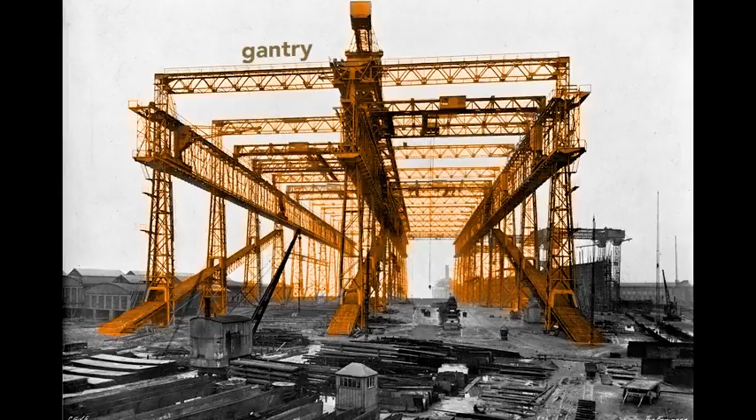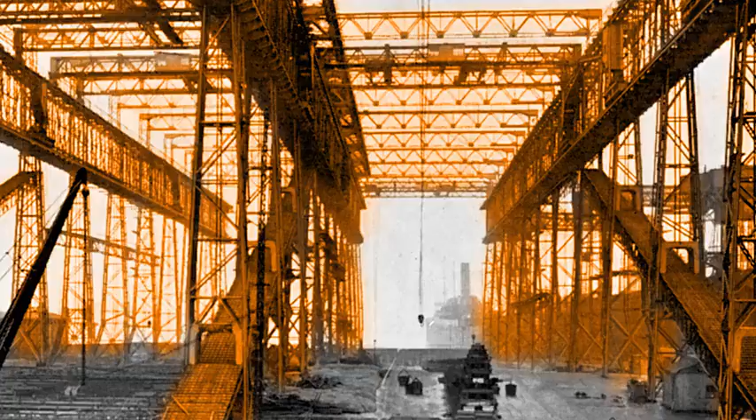This large framework, called a gantry, surrounds the ships as they are built. It supports the overhead cranes and scaffolding used by workers as they construct the Olympic and the Titanic. Notice that just beyond the far end of the gantry lies the Belfast harbor. Workers will build the Olympic here on the right, and then 9 months later, before the Olympic is finished, they will start on the left the Titanic. When completed, the Olympic's stern or rear end of the ship will point toward the harbor.

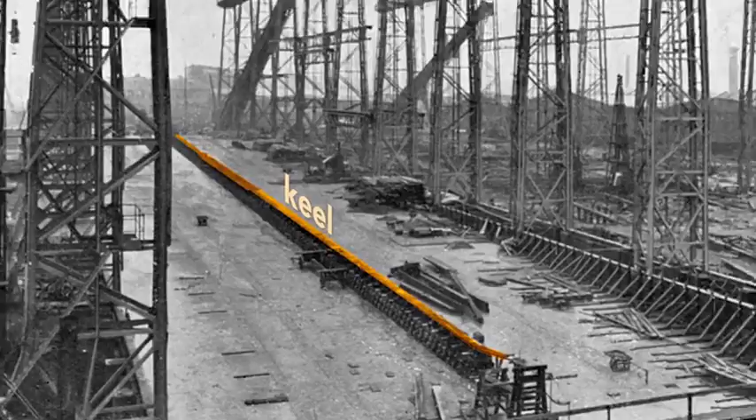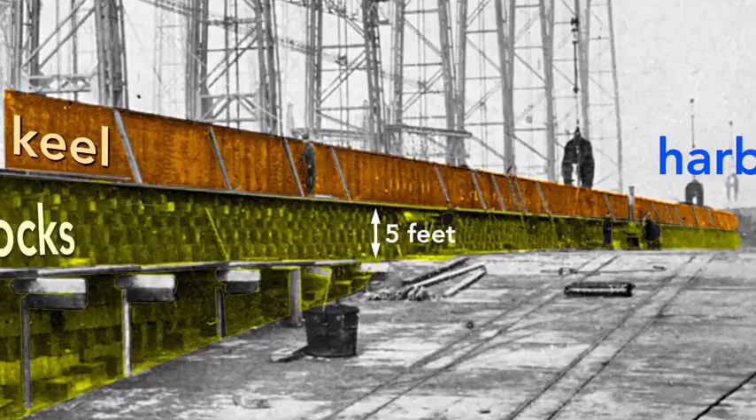The ship's construction starts with its keel, seen here as a long, dark shape. The keel is the backbone of the ship and gives the ship rigidity. If we look at the keel from the land side, we see the keel blocks that support it. These wooden blocks, typically pine, separate the ship from the slip, the concrete floor of the gantry. Each keel block stands about 5 feet high, so this creates a space under the ship for workers to construct the ship. Workers build the ship outward from the keel.

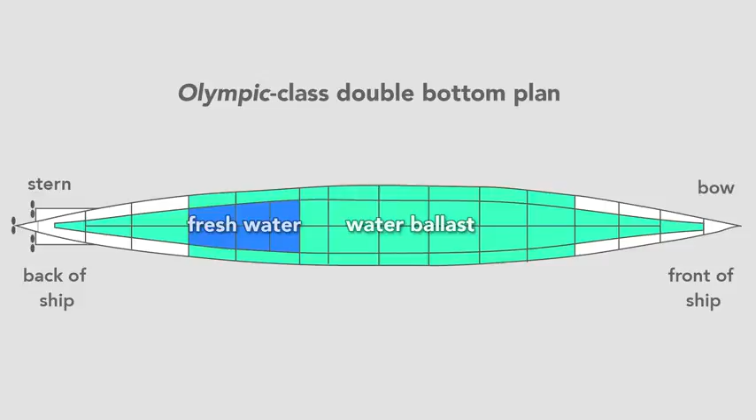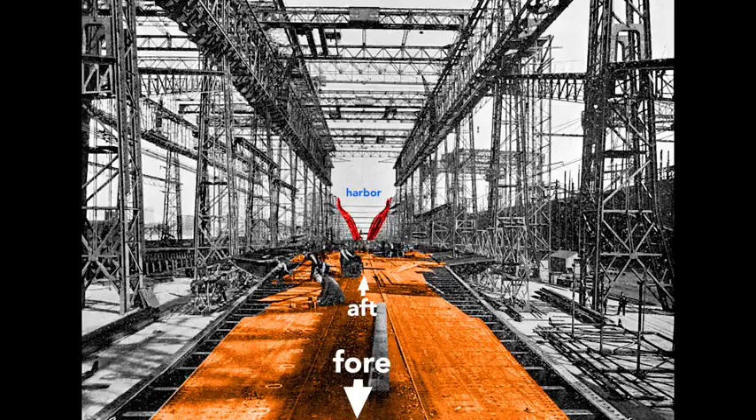Once they finish the double bottom, workers erect the framing for the hull. From this view, we see the framing for the stern of the ship. It's what a worker would see standing on the tank top from the fore and looking toward the aft of the ship. That's where the harbor is. Looking closer, we see the rib-like structure on the start of the transverse frame of the ship. Workers rivet to this frame the hull, which will form the skin.

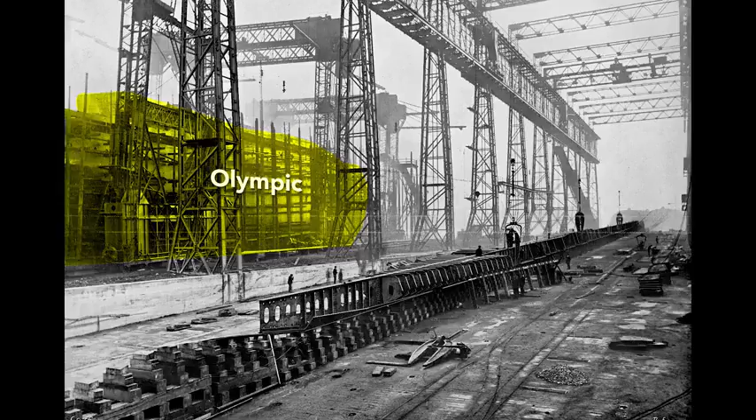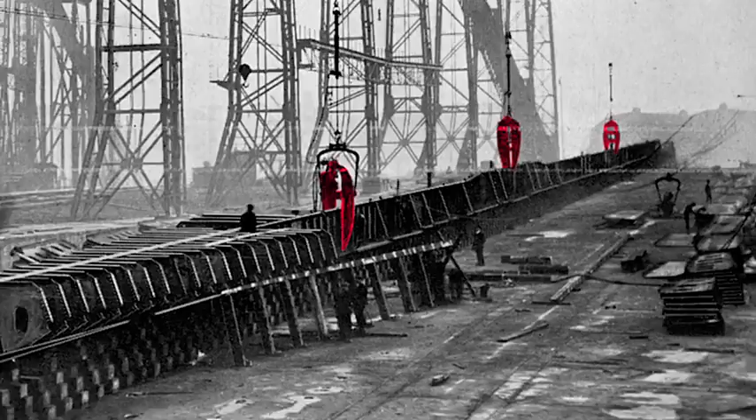So far, we've watched the Olympic's construction. In the gantry, that ship sits here in the background. In the foreground lies the keel of its twin, the Titanic. Its construction began 3 months after the Olympic. We see here, attached to the keel, the framework of the Titanic's double bottom. Notice this large claw-like mechanism lying on the ground, and these three hung from the cranes. These are hydraulic riveters, which workers used to install most of the 3 million rivets on the Titanic.

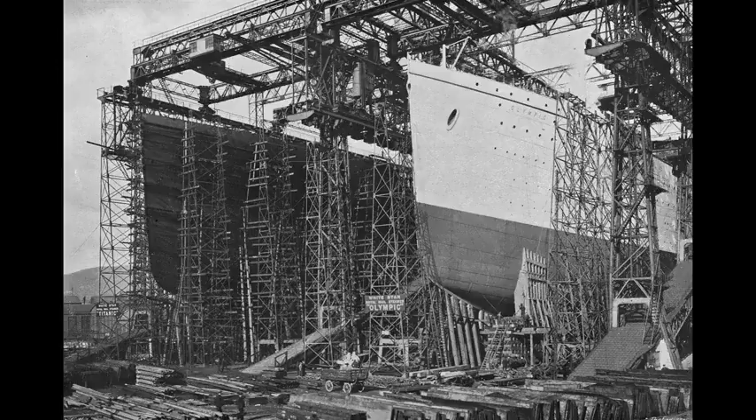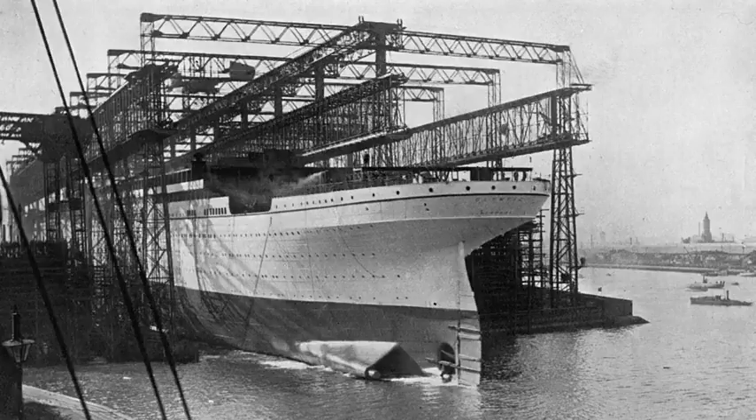Here we see the almost complete hulls of both the Olympic and Titanic. Work inside the Olympic progresses rapidly. The staterooms are being erected and plumbing is being fitted throughout the ship. To prepare for the Olympic's launch, workers paint the ship a light gray so it will stand out in black and white photographs, although they repainted the ship black soon after its launch so that it matched previous White Star liners. To ease the slide into the water, the slip was greased with 23 tons of tallow, oil, and soap.

And then the order to release the ship was given, the hydraulic triggers were released, and the ship slid into the harbor, reaching a speed of 12.5 knots. Notice that the ship is launched backwards. There are many reasons for this, but among them is that the stern, the rear, is wider than the bow, so it is more buoyant. In a mere 62 seconds after launch, the Olympic was afloat. The moment the ship hit the water is its official launch date, although it was mostly empty.

Here it weighs only about 27,000 tons and so rides high in the water. The draft, the vertical distance between the bottom of the ship and the surface of the water, is only 18 feet. After it is completely fitted, it will weigh nearly twice that, 52,000 tons. With that additional weight, the Olympic will drop until the water reaches the border painted on the hull, a draft of about 34 feet.

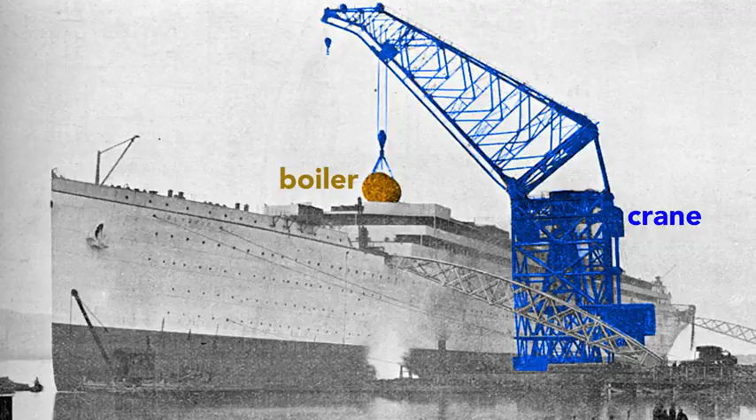The Olympic cannot move by itself, and so a tugboat tows it to the fitting out quay where a gigantic crane loads the ship. Here the crane lifts aboard a cylindrical boiler. The final fitting, including attaching the propellers, is done in dry dock. And then, once everything is in place, the Olympic is ready for the sea.

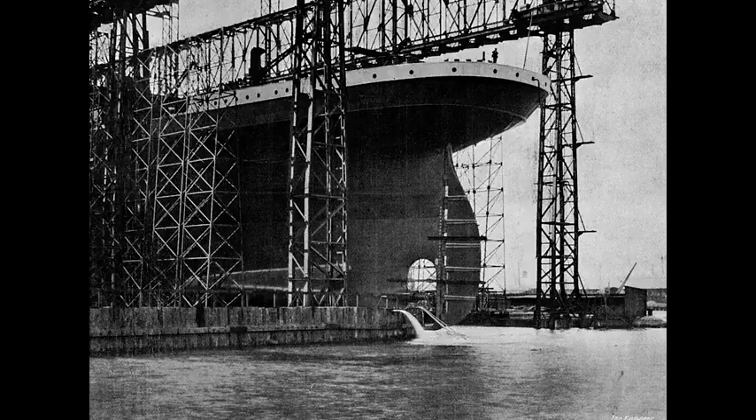7 months after this launch, the Titanic was launched. I have from this journal a few photos of that event, but keep in mind the Olympic got the big press because it was first. The Titanic only becomes of more interest in retrospect. This photograph shows the twins, the Olympic and Titanic.

Although built side by side, this was the last time they were photographed together. Less than a year after the launch of these two giant ships, one suffered a collision that ripped a gaping hole in its side. That ship was, of course, the Olympic.

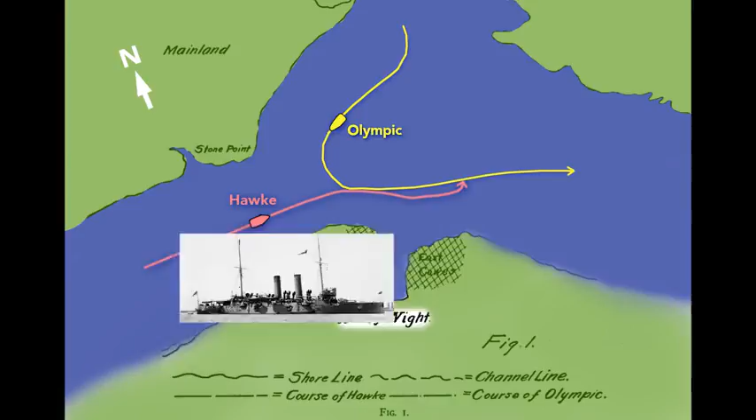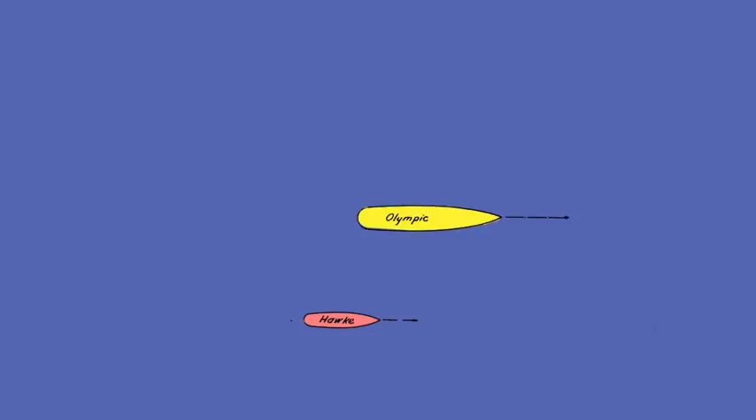In September of 1911, the Olympic departed the port of Southampton, England, sailing toward the Isle of Wight. The Olympic turned into the Solent Strait and passed a British warship, the HMS Hawke. The Hawke's commander was surprised by the Olympic's wide turn, but he managed to take a safe position behind and to the right of the Olympic. The Hawke then increased its speed to pass the Olympic, but the Olympic's wake sucked the Hawke inward rapidly.

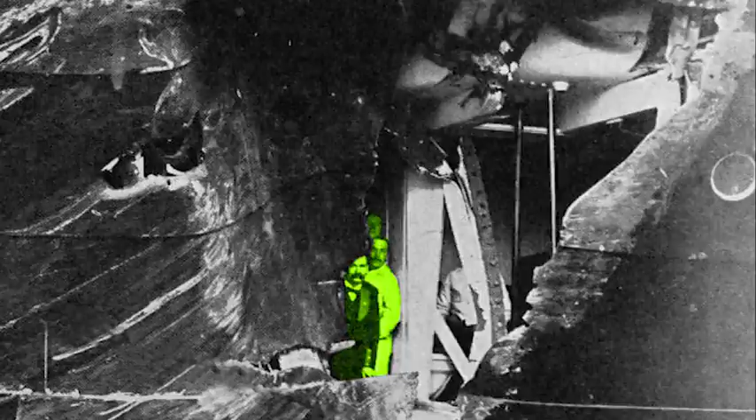The Hawke tore a large hole in the Olympic, and below its waterline, the damage was even greater. The bow of the Hawke was completely smashed in. The Olympic limped back to Southampton, where the holes were temporarily patched with wood before returning to its home dock in Belfast for repairs.

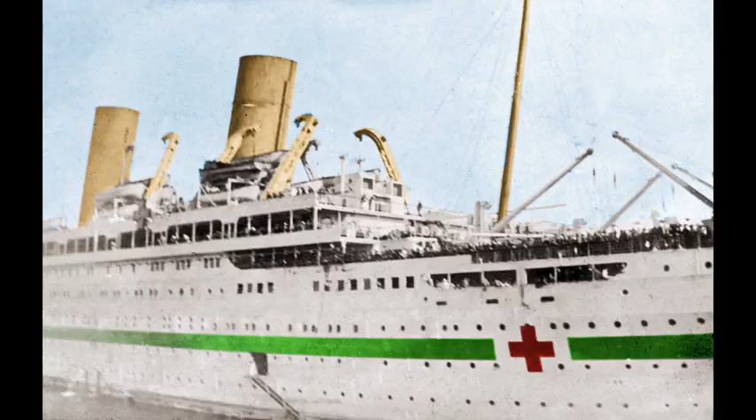The Olympic's sibling also suffered a traumatic blow that caused it to tragically sink. I'm of course talking about the Britannic. The Britannic was the same size and very similar to the Olympic and Titanic. Although intended to be a passenger liner, the ship was drafted into military service in World War I as a hospital ship. While in the Mediterranean, it hit a mine or was struck by a torpedo and sank in less than an hour. Despite these accidents, the Olympic-class ships were great feats of design and workmanship.

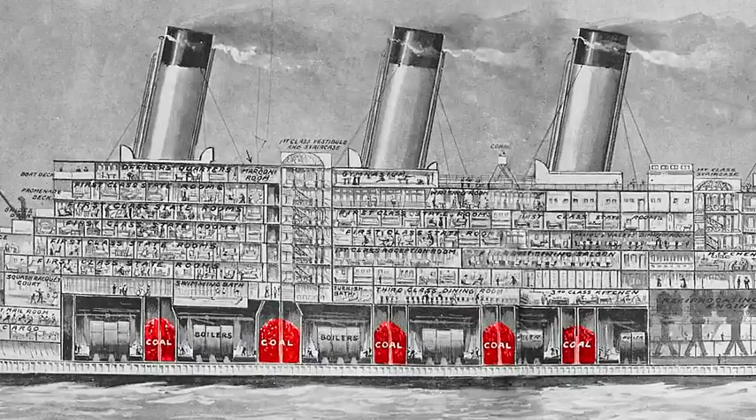Just consider the propulsion system of the Titanic. The ship had two sets of reciprocating engines. These engines were fueled by coal, which was stored along the bottom of the ship. Exhaust gases from the boiler discharged through these smokestacks, which are frequently called funnels. Now, they don't look like funnels until you look at them the right way. They're upside-down funnels. This cross-section of the Olympic shows the boilers sitting atop the double bottom. Exhaust from the boilers is funneled up and out of the ship.

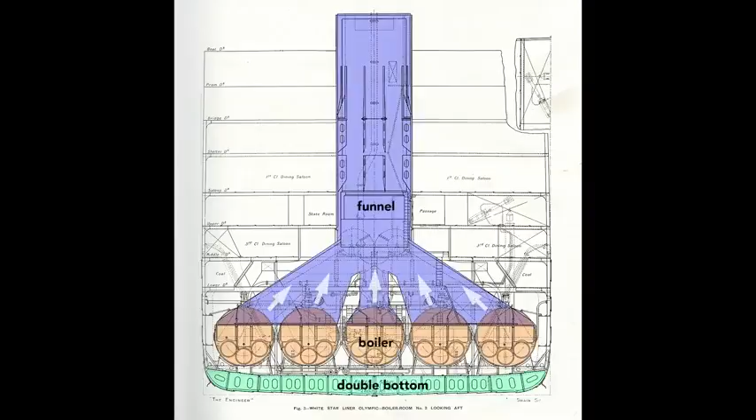It's well known that the aftmost funnel on these ships is a dummy. It was built primarily for aesthetic reasons. Although it did not service the boilers, it was used as a ventilation and extraction shaft for the engine and turbine rooms.

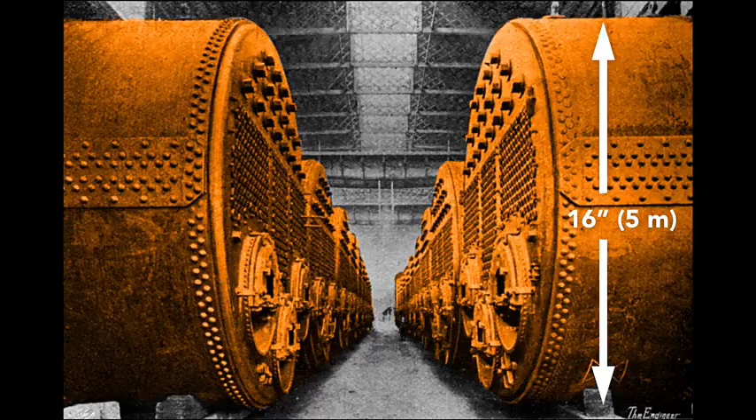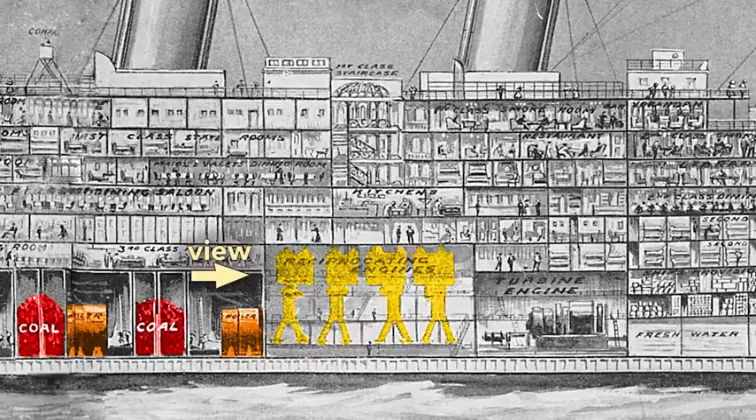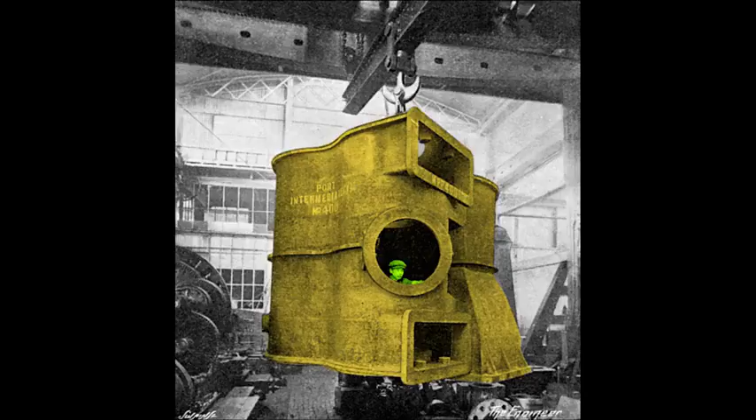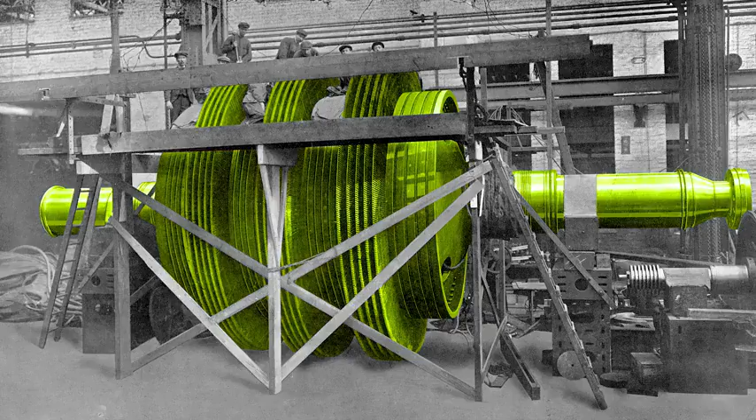Excess steam from these engines was used to drive a turbine engine. This shows the turbine under construction and without its outer casing. Note the workers at the top. This is huge. If you look closely, you can see that the turbine is made of hundreds of individual blades.

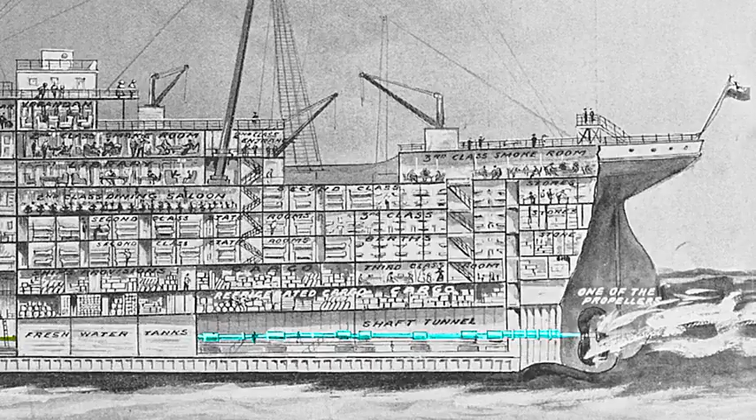A shaft transfers power from the engines to the propellers. The ones on the left and the right were powered by the reciprocating engines, and each propeller weighed 38 tons, while the central propeller was powered by the turbine engine. It was cast as a single piece of manganese bronze and weighed 22 tons. The outer propellers were used for tight navigation of harbors, while the central propeller was used only in open seas. Also, unlike the others, the central propeller could not be driven in reverse, only forward.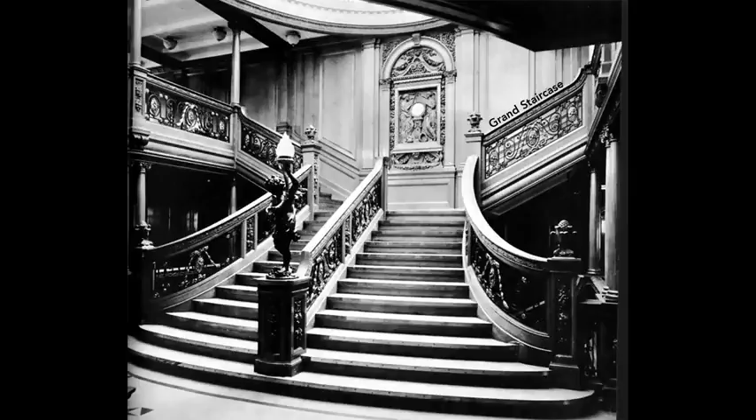Even with this powerful propulsion system, the Olympic-class ships were not the fastest at the time, which was intentional. The White Star Line decided to focus on comfort and luxury over speed. It's clear that the lavishly decorated rooms on the Olympic and Titanic certainly made the passage more enjoyable, but there were some hidden design choices that made these ships the pinnacle of comfort for all classes of service.

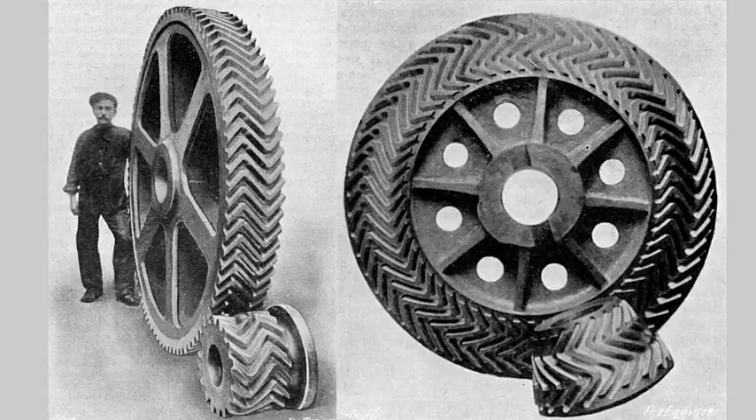The ships were steered using these helical gears. Each ship had two sets of both the spur gears and the beveled gears. These massive gears are nearly 6 feet across, made of solid steel, and each weigh thousands of pounds. Notice the herringbone pattern on the teeth. This pattern allowed a tight engagement of the teeth and resulted in reduced vibration transmitted to the rest of the ship. Altogether, the gearing on the Titanic weighed about 7.5 tons.

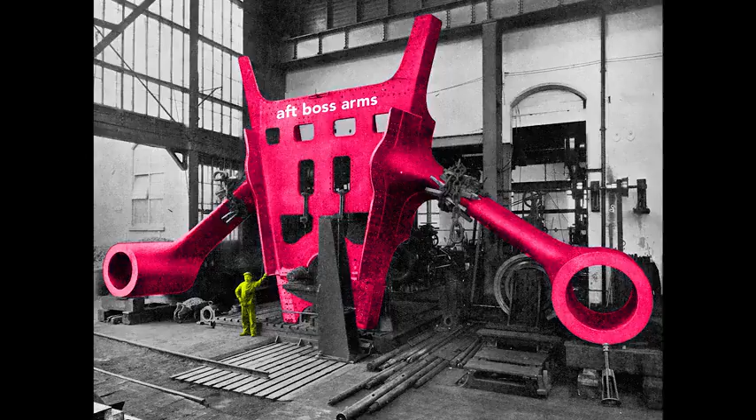This very large structural piece is called the boss arms. These arms held the shafts of the outer propellers in place, and because of their size and strength, they reinforce the hull, which reduces panting. Panting occurs when variations in water pressure, say the crest versus the trough of the wave, flex the hull inward and outward. Less flexing results in less vibration felt by the passengers. These boss arms, also called shaft brackets, were fitted 20 feet apart at the very aft of the ship.

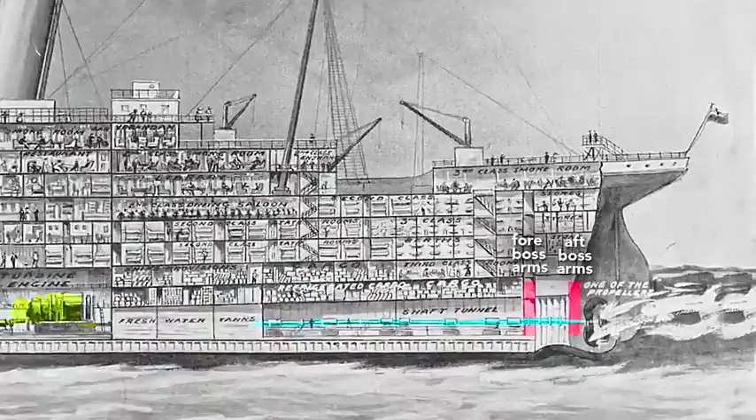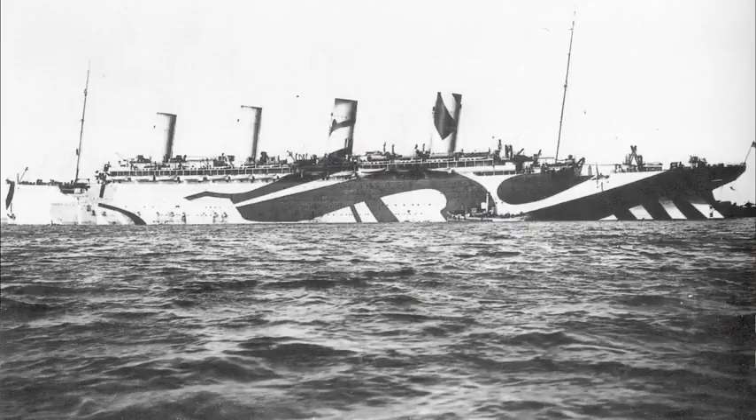While the Titanic and Britannic both had tragically short careers, the Olympic triumphed. In its lifetime, it made over 500 transatlantic journeys, carrying over 400,000 passengers and sailing 1.5 million miles. It even spent 4 years as a U.S.-Canadian troop transport during World War I, earning the nickname Old Reliable. After 24 years of service, the ship was decommissioned and scrapped for parts.

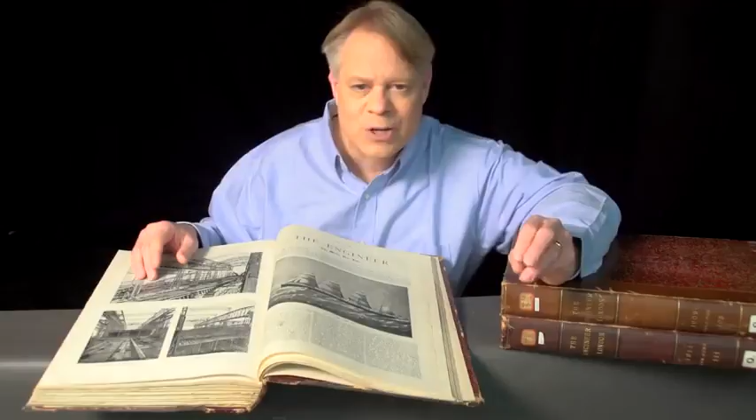The Olympic-class ships were absolute marvels of engineering. I hope it's for their revolutionary design rather than their failures that they're remembered.